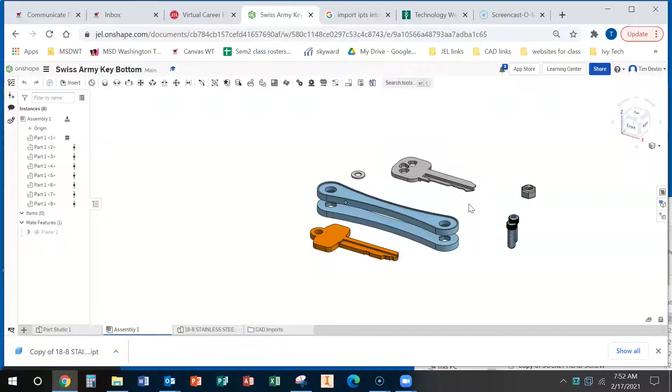This is going to show you how to take your parts and put them into Onshape, and you can use my parts that I've shared. What you'll want to do on Onshape first is create a folder and call it Swiss Keychain Parts. I'll have all of these parts for you, but if you want to take your Inventor files in, we can do that.

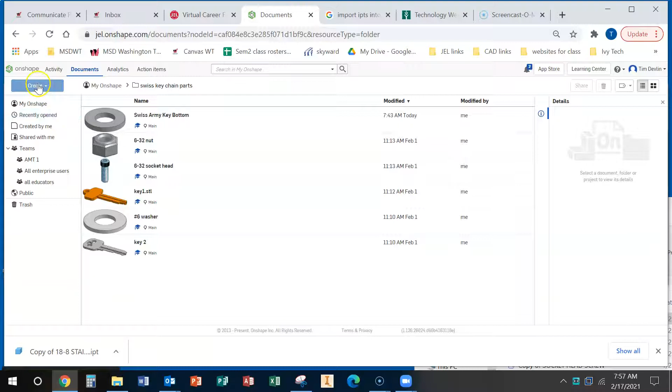So if you go to create, import files... actually, import files, and then we can go to your project file, like if you wanted your part.

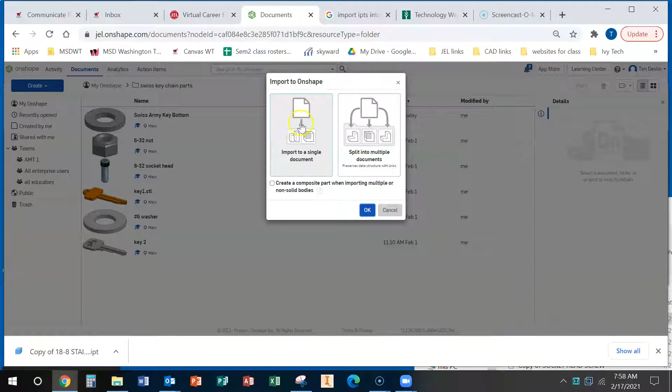Here's my back piece, so Swiss keychain, lock nut side, open that. We'll do import into a single document. Now we should have our IPT in here. You create import and then it goes into our folder. Now if we did a new document...

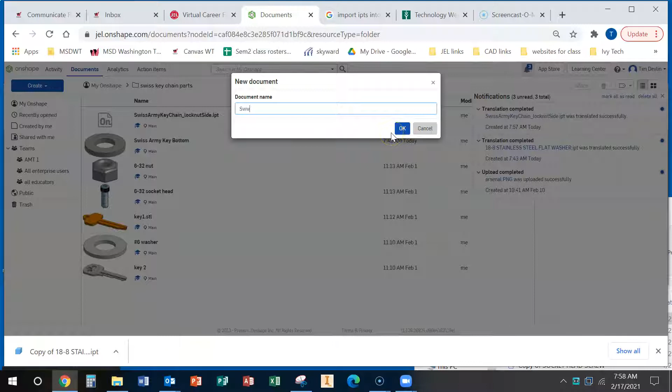Should be able to take files from a couple places. I'm going to go to my assembly first. I can do insert, and I should be able to find my part—if I go to Onshape and then down to Swiss keychain parts, I should be able to grab my part that I made in Inventor and import it into Onshape.

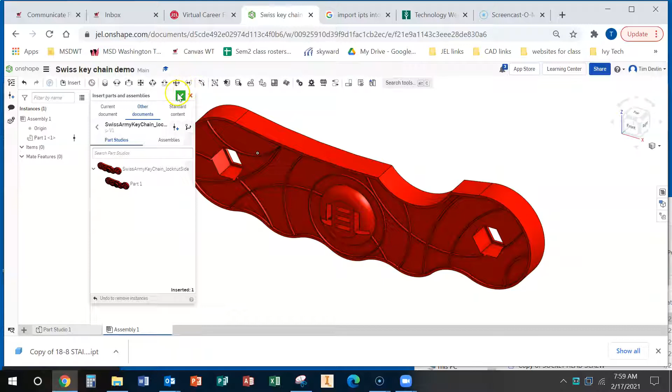Then I have the choice: I can either use the parts that I made on Onshape, or you can insert the other parts that I shared with you in that Google Drive folder. Either way, it'll be the same result. You just go to insert again, and now other documents. If you go to AMT1, you should have Swiss keychain parts, and I've got the keys, the washers, the lock nuts—all that stuff is here.

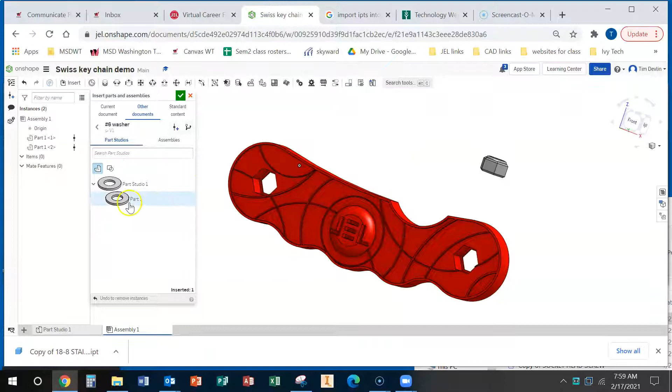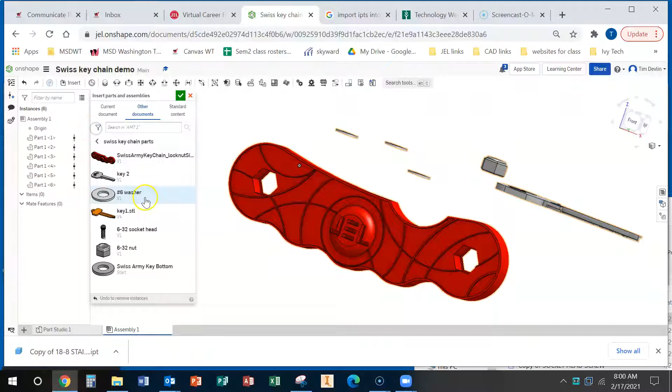So I'll put in a lock nut. We'll go back one—let's put in a washer. Actually, we need a couple washers. And then let's put a key in—we'll do the harder one. And we'll insert the screw. Alright, so we've got our parts here, and I didn't put the other side in, but I'm just going to get you guys started on the assembly.

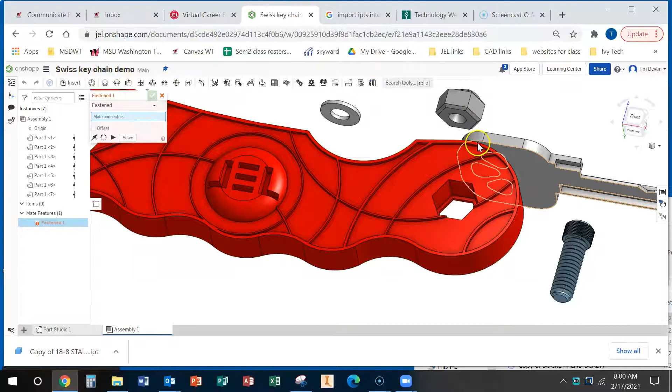So this side is where we want the lock nut to go—this one's somewhat easier. You do a fasten mate, and you're going to choose the plane. So I want this plane in the middle, and I think the center too.

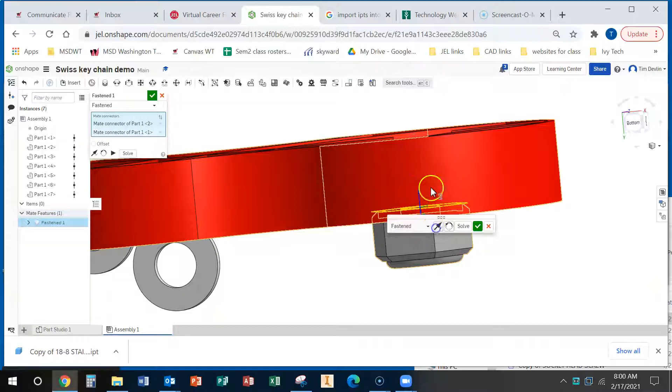Let's see if we can get it to work. So choose the center—right now it's defaulting to the center, so if I click on that, it locks in there, but right now it's upside down. So I can flip it, and now it should be the right side up. I click the check to save it, check it out—it is sitting right up against there, so that looks good. Alright, now I'm going to go ahead and put the screw in next.

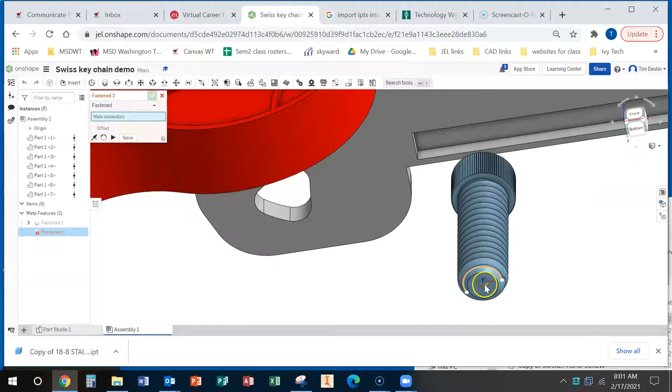So how I'm going to do that is I'm going to take the center of it. So I want to find the bottom, the center. Then I'm going to go in here, find that middle part in the center, and click the check. Now we're just getting close, so this might not be perfect, but it looks alright to me.

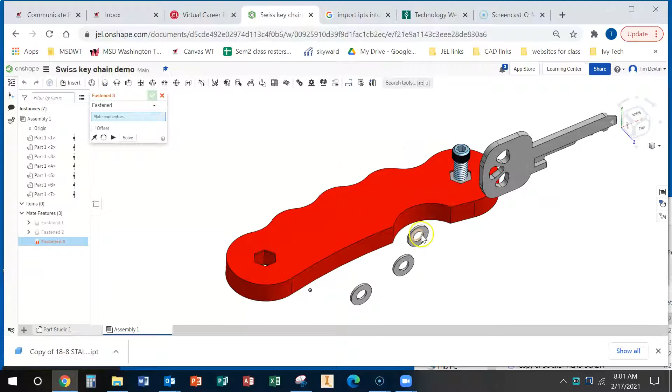And now we can do our washer. So I'll take the washer, find the center, go here, and see if I can get it to lock into the center of that. Make sure it's not on top—make sure it's on top, so you can flip it this way. Now we've got a washer in there.

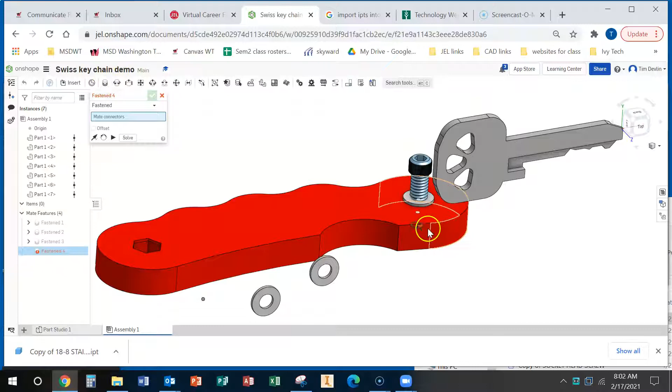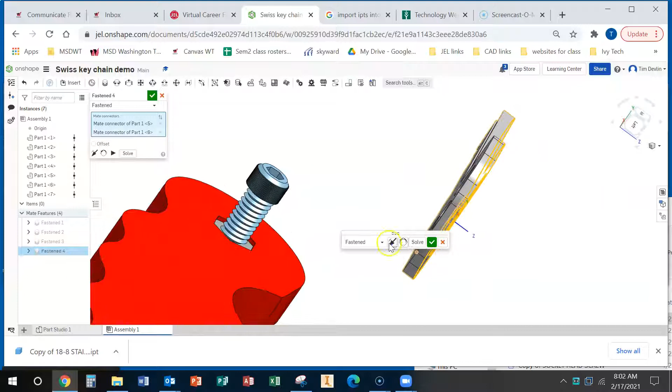And now we're going to put our key and make it rotate, and then you just keep going from that. So I'll take this again, and I'm going to find the center. So I'm going to find this top face—sometimes it takes some moving around. You find the center, and then here, if I find the center of this shape, which is wild, it will move to that, but then just want to make sure it's not going. I think when you click check, it should all move together.

Now the reason that happened is because I forgot an important step, so make sure that you fix your first thing, and now it should work. Now here's what I wanted to show.

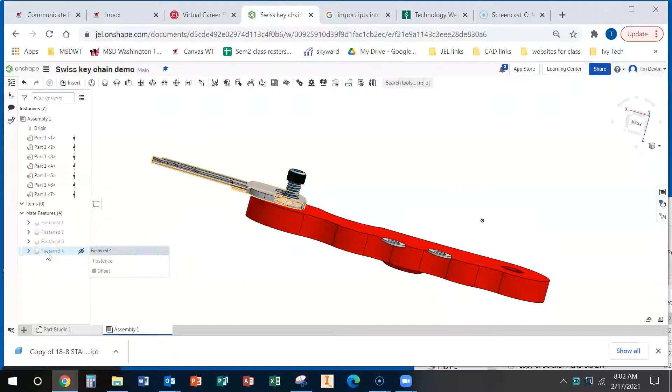So we want these keys to move. This is a fastened mate—so if I right click on this and go to edit, now I can do revolute, and now this will spin. Well, that did not fix... now it should spin.

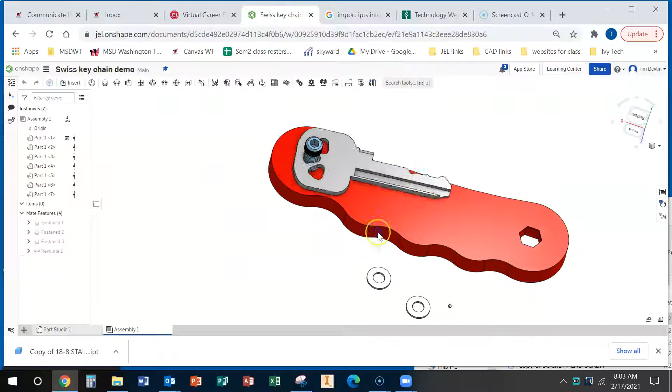So you can change it to revolute, and then you can get things to spin and line up. Now you just got to put the other key in, maybe 2 keys on each side, and then the washer, and then your other part should go on top. You should have a finished assembly. Again, it's not going to work right the first time—you might have to try it a couple times. That's just how this stuff works. Good luck.